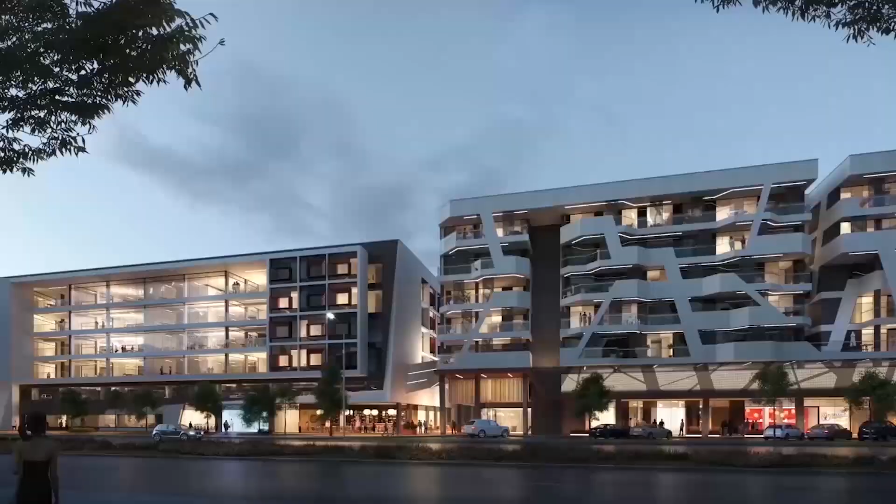The Stirling City Centre is identified as one of 10 strategic regional centres in the Perth metropolitan area, and together with the Herdsman-Glendalough area will become Perth's second CBD. It is envisaged to become an accessible, vibrant urban centre, providing a broad range of services for the wider community, with increased employment and housing opportunities.

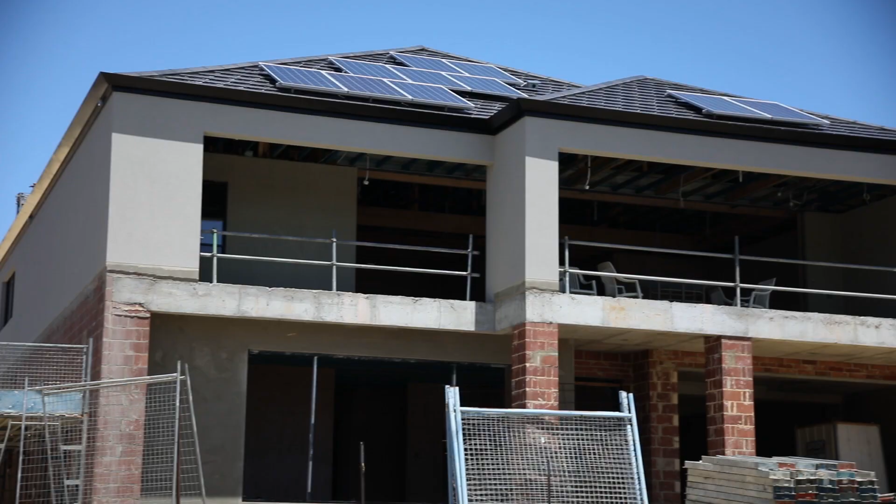Perth and Peel at 3.5 million is the state government's planning and growth strategy for metropolitan Perth. The strategy identifies housing and employment targets for local government to achieve. The Stirling City Centre is the City of Stirling's largest activity centre and aligns with the state government strategy for growth. The planning strategy outlines how the city will meet the dwelling and employment targets of the state's Perth and Peel at 3.5 million plan.

This plan is a detailed analysis of where the city's growth will occur and provides specific targets for local areas. Again, the city's planning strategy is in line with the state government's requirement to accommodate the majority of the city's future growth along urban corridors and in activity centres.

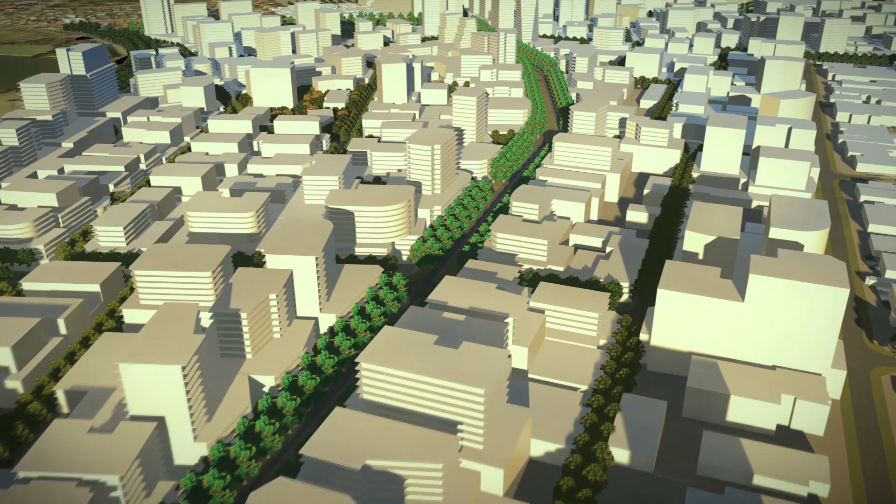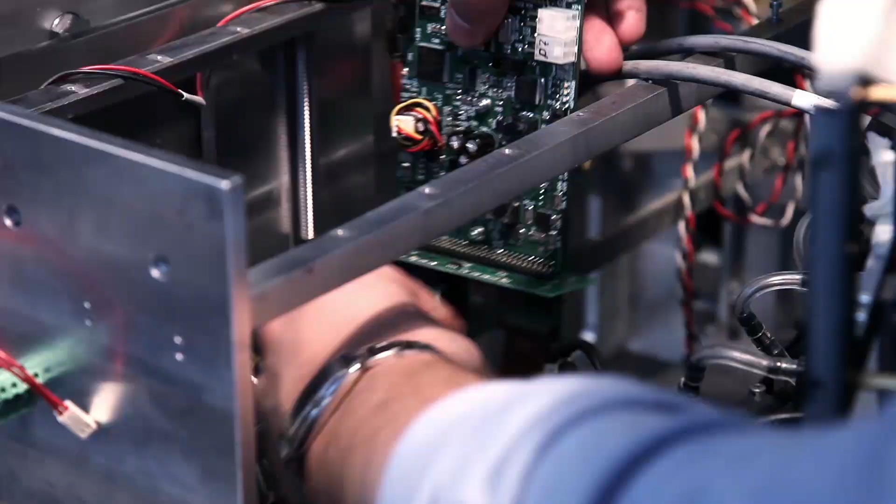The City of Stirling has worked closely with the state government, key stakeholders and our community to develop a bold vision for the Stirling City Centre. We will transform the Stirling City Centre into a sustainable 21st century city, an accessible, sustainable and vibrant urban centre, providing increased jobs and housing, and connecting transport from the heart of the city to the iconic Scarborough Beach Precinct.

The Stirling City Centre is currently dominated by cars and traffic, and its road network is nearing capacity. In order to accommodate the estimated additional 150,000 trips that will be generated by new residents and new employees over the next 30 years, the way people move around will need to change dramatically.

It is important that the city makes plans to prioritise alternative transport options in and around the Stirling City Centre to accommodate growth, improve accessibility and traffic congestion.

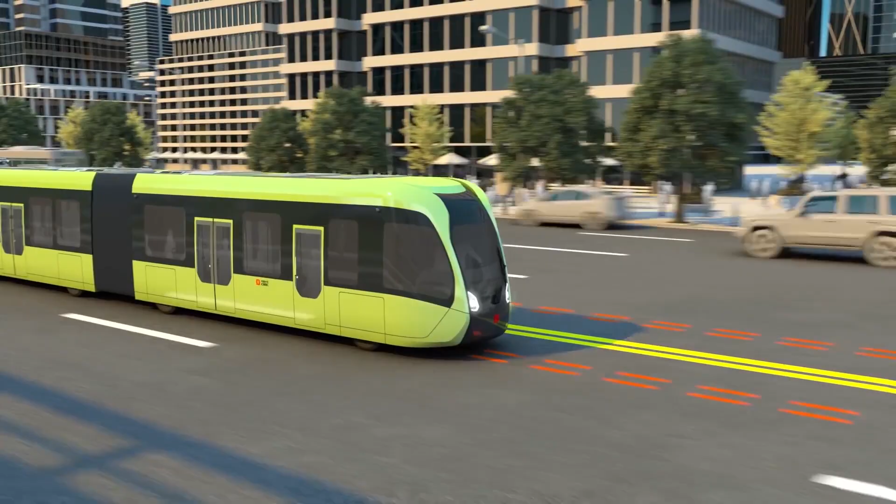To achieve this, we will prioritise access for pedestrians and cyclists with new footpaths and cycleways. We will plan to provide new road connections in and around the centre to reduce traffic on major roads. We will also advocate for a light rail network that will connect at both the Stirling and Glendalough train stations and run along Scarborough Beach Road through to Scarborough Beach.

The new proposed cycling infrastructure will encourage all age groups to cycle in and around the Stirling City Centre. The Stirling City Centre's proposed cycling network will link the station to Scarborough Beach, the Stirling CBD, Herdsman Lake, Innaloo Shopping Centre, as well as surrounding residential and employment areas.

To facilitate a significant increase in pedestrians in the Stirling City Centre, numerous improvements will be required. These include footpaths on all streets, more street trees, slower traffic, safer streets, and the addition of plazas and public spaces, and improved pedestrian crossings. The plans highlight streets that are required to have weather protection and new crossing points together with new plazas.

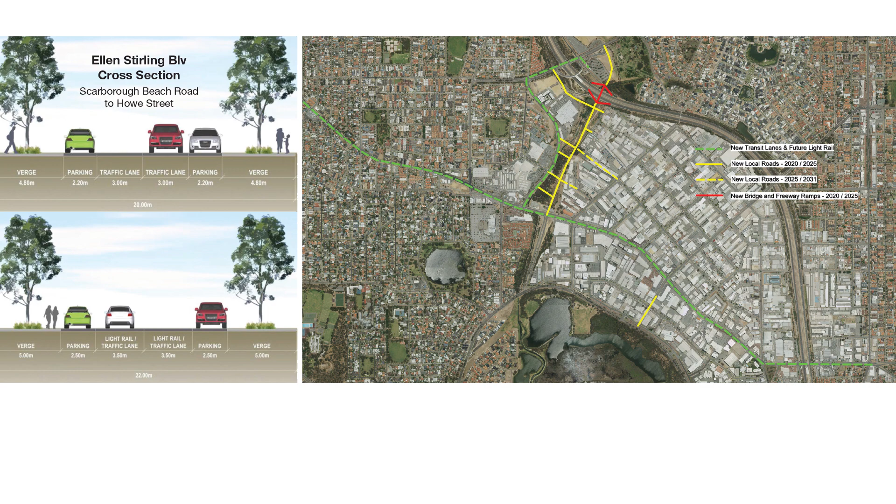The city has plans to reduce traffic to help make travelling within the Stirling City Centre easier. With an expected growth in housing and employment, the city has made plans to provide new road connections within the Stirling City Centre. These plans highlight numerous road and network improvements to improve circulation, reduce traffic on key arterial roads, create shopping and dining streets, and improve pedestrian access to Stirling Station.

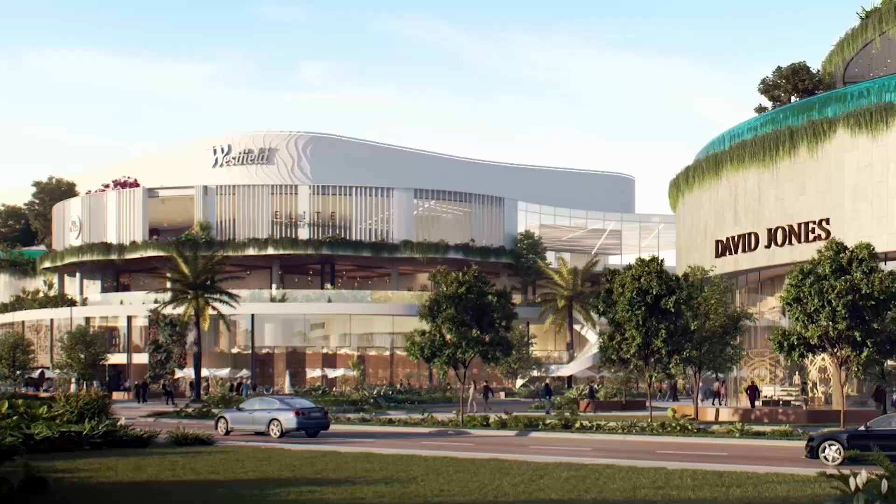Pedestrian-friendly slow-speed shopping and dining streets to create a centre hub is critical to deliver the vision of the Stirling City Centre. Stirling City Centre is fortunate to have a year-round running stream through the city centre.

The vision is to transform the waterway into a combination of a living stream in areas where there is sufficient space and into an urban stream where there are space constraints. The future waterway will link the city centre to Herdsman Lake, with lineal open space both sides of the waterway.

The city is looking at creating more open space to cater for the increasing population as the Stirling City Centre grows. This includes a new lineal open space running from Herdsman Lake to the Stirling Civic Gardens, a possible reconfiguration of the Stirling Civic Gardens, additional open space in the station precinct, plus a new large open space area south of the freeway.

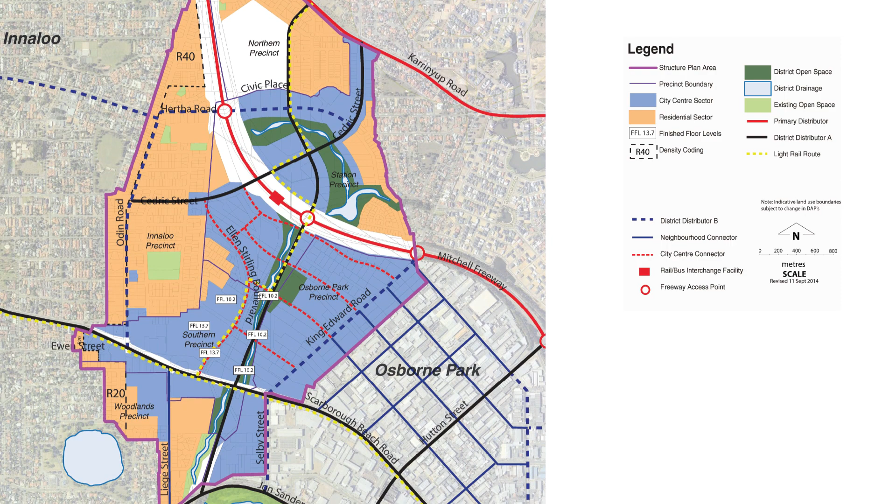The Stirling City Centre structure plan identifies where residential and mixed-use areas would be best located, as well as new public transport, cycling and pedestrian infrastructure, and new roads and new public open space.

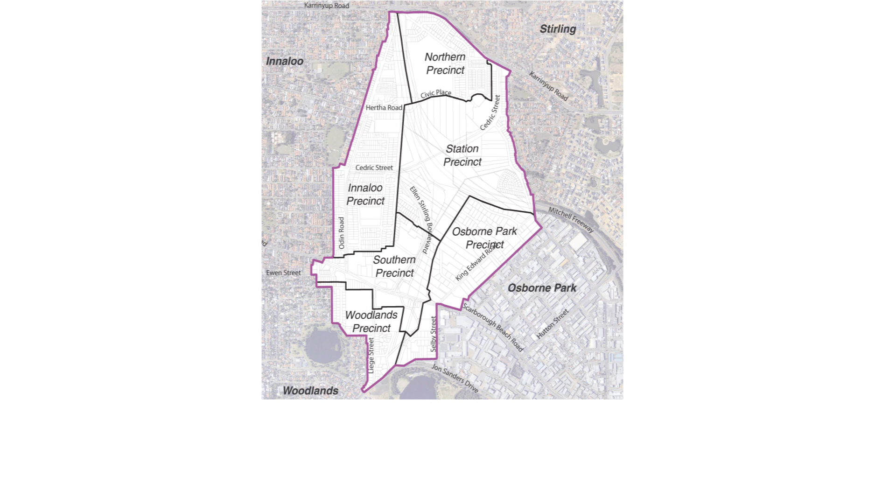The structure plan area is split into 6 precinct areas: Innaloo, Woodlands, Southern, Station, Osborne Park, and Northern precincts. To date, the City has adopted comprehensive local development plans for 5 of the precincts, identifying the exact location of permitted land uses, building locations, building setbacks, and building heights.

The Osborne Park Precinct Local Development Plan is yet to be fully prepared and requires a comprehensive funding plan and an implementation plan to deliver key objectives.

The Innaloo Precinct Local Development Plan will be characterised by low-rise apartment buildings in the residential streets, with a few key mixed-use sites. The residential area will be in close proximity to the future shopping and dining area on Ellen Stirling Boulevard and Oswald Street.

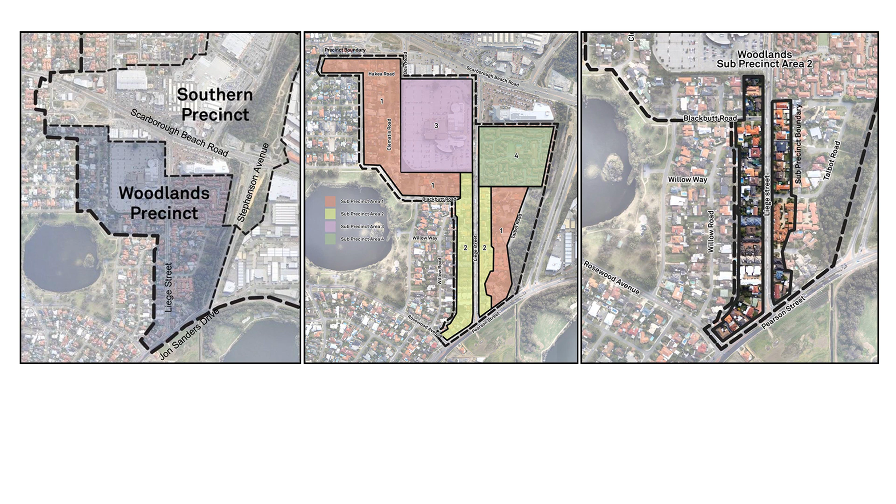The Woodlands Precinct Local Development Plan will be characterised by low-rise apartment buildings in the residential streets, with a few key mixed-use sites on Liege Street. The residential area will be in close proximity to a future shopping and dining street on the cinema site.

The Southern Precinct Local Development Plan will see major transformation and be characterised by mixed-use buildings with residential above. Scarborough Beach Road will be calmed to slow traffic speed. The light rail would run from Glendalough Station to Scarborough Beach, and Stephenson Avenue will be extended north of Scarborough Beach Road to Cedric Street.

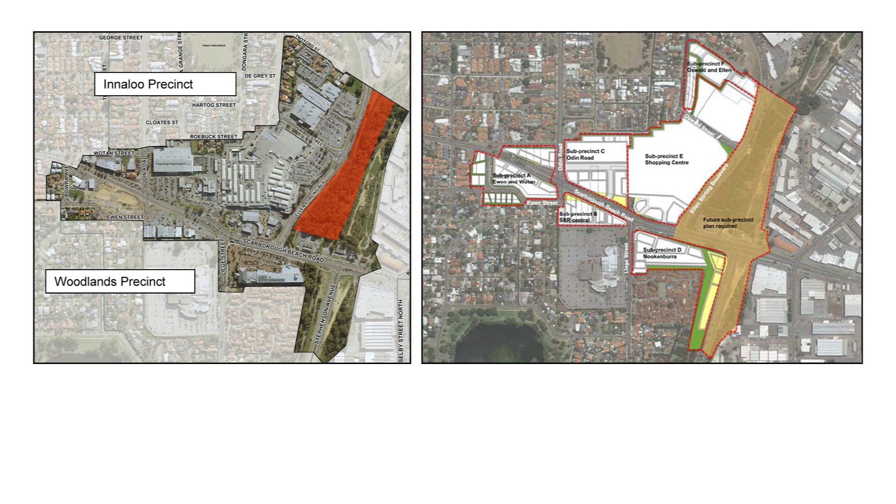Ellen Stirling Boulevard will become the city centre's new shopping and dining street, and a new town square will be constructed. There are also plans for a new park and waterway between Ellen Stirling Boulevard and Stephenson Avenue, creating a pleasant walkway.

The Station Precinct Local Development Plan will see a major transformation and will be characterised by high-rise mixed-use buildings with residential around the Stirling Station.

Stephenson Avenue will be extended north of Scarborough Beach Road to Cedric Street and would be a slow-speed business boulevard with high-rise mixed-use buildings fronting the street.

The Cedric Street ramps will be removed to enable new local streets to be built, and light rail will run along Ellen Stirling Boulevard to the Stirling Station, with connections to Scarborough Beach and Glendalough Station.

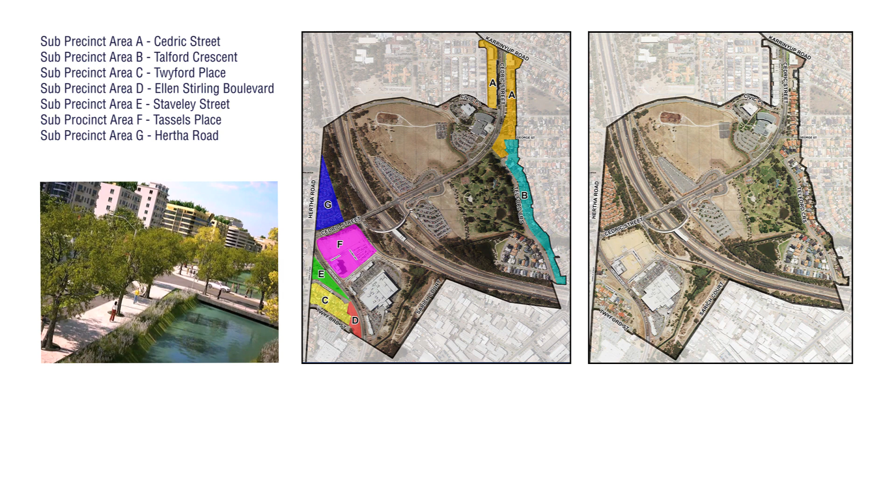There will be a new park and waterway between Ellen Stirling Boulevard and Stephenson Avenue, creating a pleasant walk from Scarborough Beach Road to the Stirling Station.

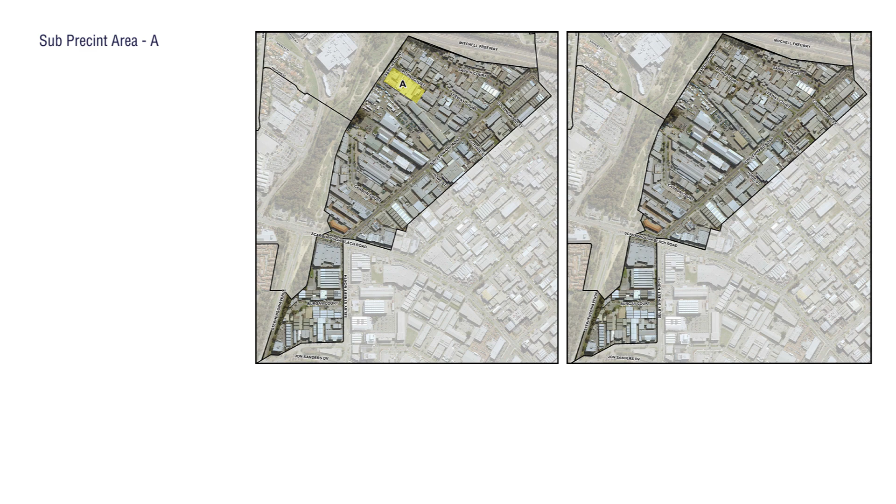The vision for the Osborne Park Precinct is to transform it from an industrial area to a mixed-use area with mid-rise buildings. No major development is permitted in this area until detailed planning is completed to fund new roads, public open space, and a school site.

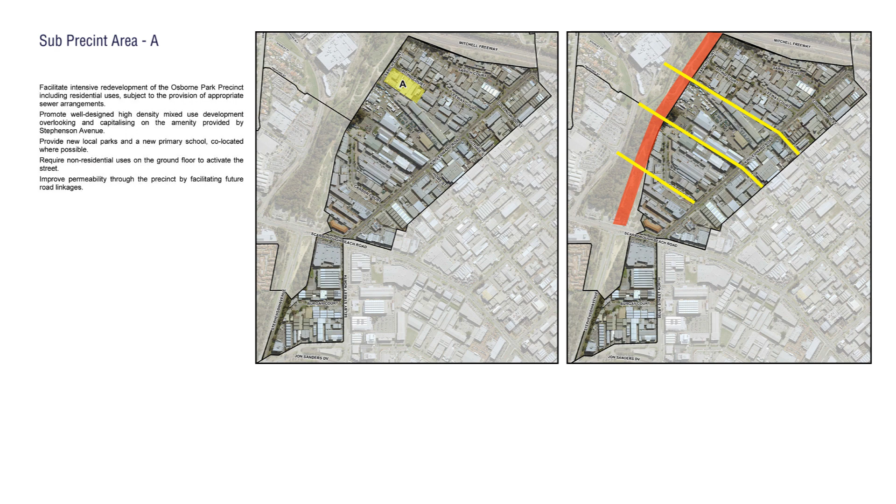Stephenson Avenue will provide a new road frontage to those lots currently backing onto the old freeway reserve. New east-west roads linking Ellen Stirling Boulevard and King Edward Road will be constructed, including extension of Howe Street, Guthrie Street and Oswald Street.

The Northern Precinct Local Development Plan covers land on the northern side of the freeway, around the Osborne Park Hospital. This area will see a transformation from mainly single dwellings to mid-rise buildings between 3 and 7 stories in height, focused on a new road connection from Cedric Street to Karrinyup Road.

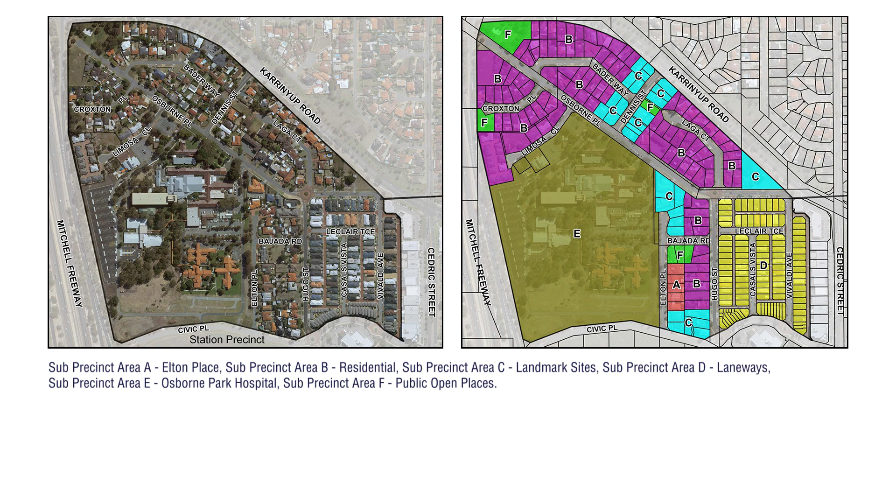Elton Place will become a mixed-use street, providing ancillary medical services to supplement the hospital. A number of landmark building sites have been identified to allow taller buildings at major intersections.

Following a commitment by both the state and federal government of $125 million, this vision is now becoming a reality. The design for Stage 1 is now complete, and construction is expected to commence in late 2019.

Stage 1 of the Stirling City Centre project involves the construction of the Stephenson Avenue road network from Scarborough Beach Road to Cedric Street. The proposed road construction is required to support the Stirling City Centre SCC development. The project is intended to improve accessibility, connectivity, travel time and local amenities.

The project consists of 3 phases. Phase 1, Scarborough Beach Road to Howe Street, delivered by the City of Stirling. Phase 2, Freeway Interchange, delivered by Main Roads WA. Phase 3, Howe Street to Cedric Street, delivered by the City of Stirling.

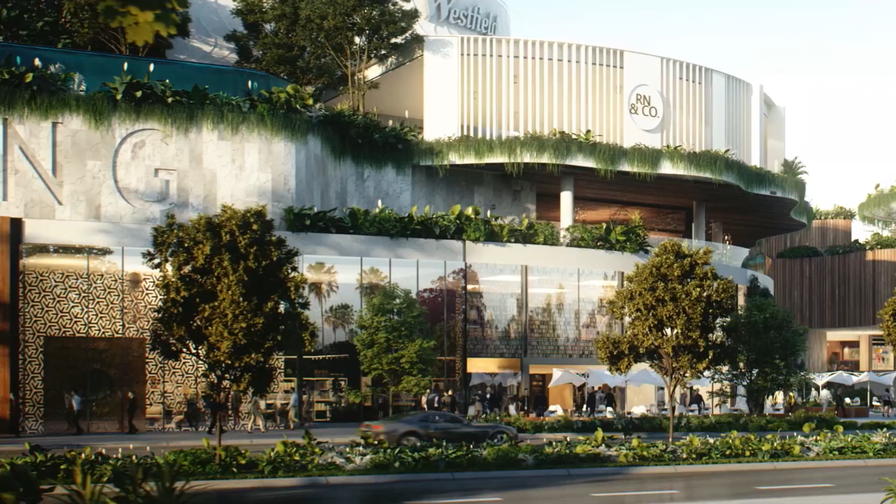It's an exciting time as we continue to work closely with the community, state and federal government and private enterprise towards achieving the vision for the Stirling City Centre. A sustainable 21st century city with an accessible, sustainable and vibrant urban centre, providing increased jobs and housing, and connecting transport from the heart of the city to the iconic Scarborough Beach Precinct. We look forward to keeping you updated with our journey.